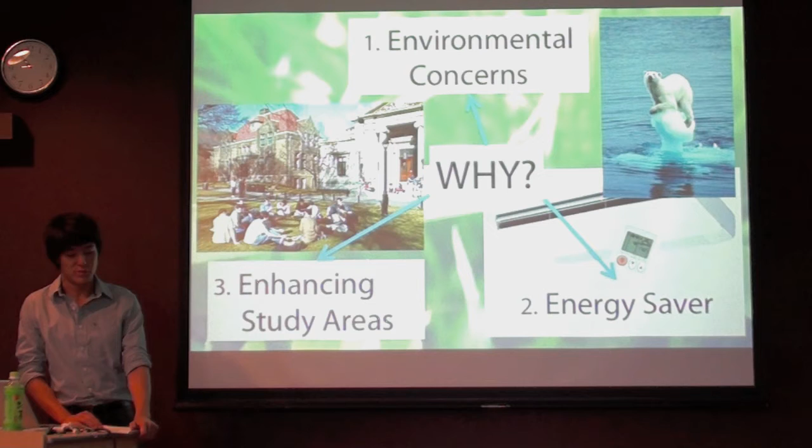The third reason is that implementing a grass roof extends the studying areas for students. Students can use it for chilling out during recess, or having lunch, taking breaks, things like that. So there are many reasons why we should implement a rooftop garden.

Now this is data worthy of comparison, taken at a factory which had a roof twice the size of ours, but which also uses lightweight soil and the type of grass that I'll be introducing - so it's quite good data. As you can see, they were able to achieve a total of 21.5 degrees Celsius of temperature difference before and after implementing the grass. They were also able to save 20% of electricity, and finally they were able to save 59.2 tons of carbon dioxide emission throughout a year.

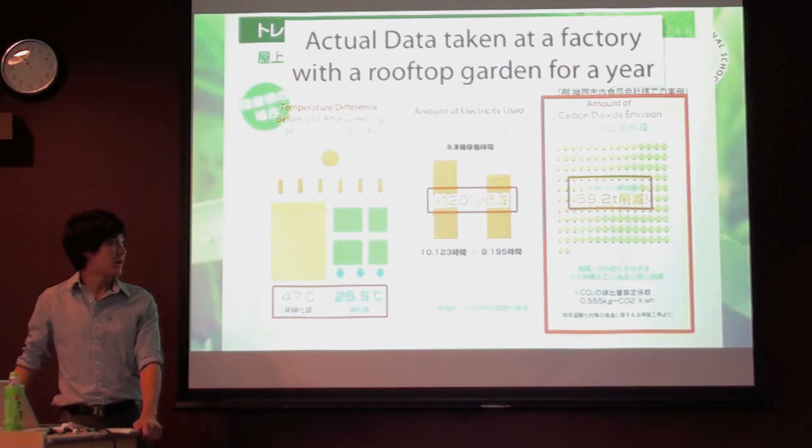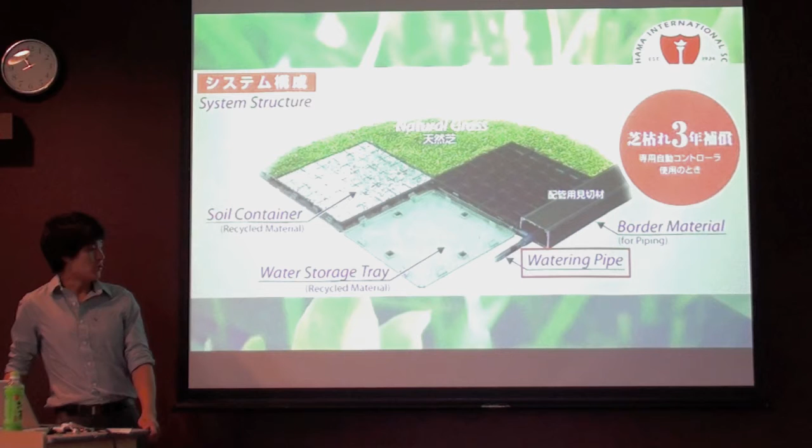This is the general system structure of this square turf light. Firstly, there is a soil container which is placed on top of the roof directly, above the water storage area, which I'll talk about. This is where water will be stored, for example after rain or precipitation. There's also a watering pipe, which can be used during the summer when it's needed for the sprinkler. This is the cross-sectional diagram of the system.

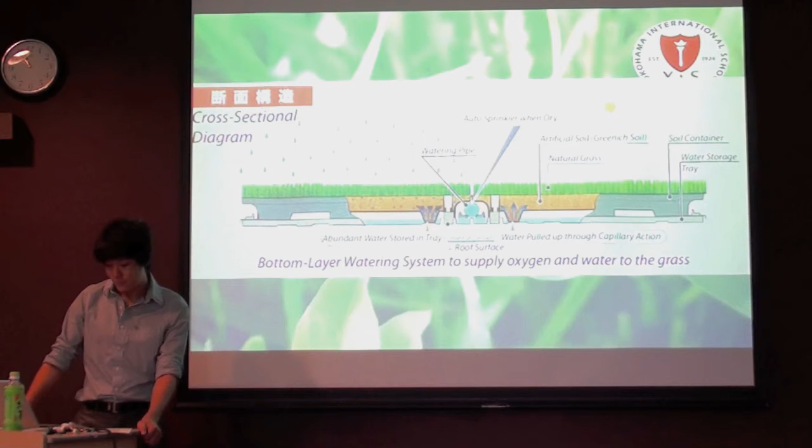Firstly, on the left side, it shows the situation when it's raining. Precipitation from the rain is stored in the water storage tray. And then, when it's sunny, when the grass is dry and the soil is dry, the water is pulled up through capillary action back into the soil where it's needed.

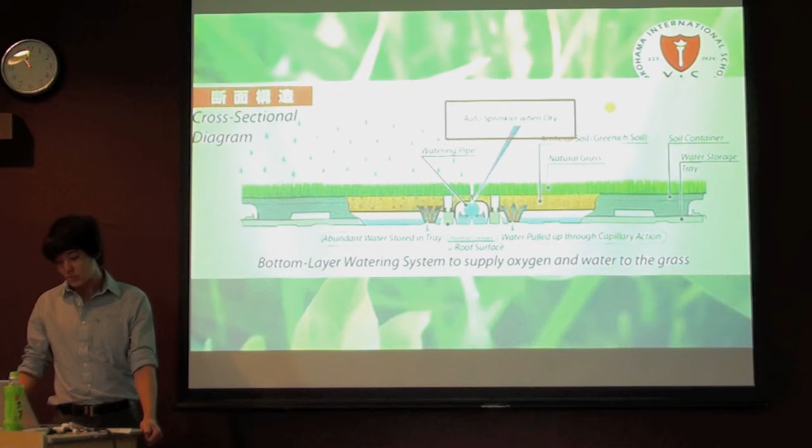Finally, when there's no water in the storage trays, the sprinkler will activate automatically. This is quite advantageous for us, for YIS, in the summer when nobody is here in school. As you can see, there's quite a sophisticated system which will keep the grass healthy.

Now, this is the construction process, and it's quite simple. This is before construction - laying the water storage tray and the soil containers onto the roof. Thirdly, there will be water pipings installed, and then the borders around the grass will be placed. And then finally, the grass itself will be placed. As you can see, they use these square patches of grass, and they just basically put them on next to each other.

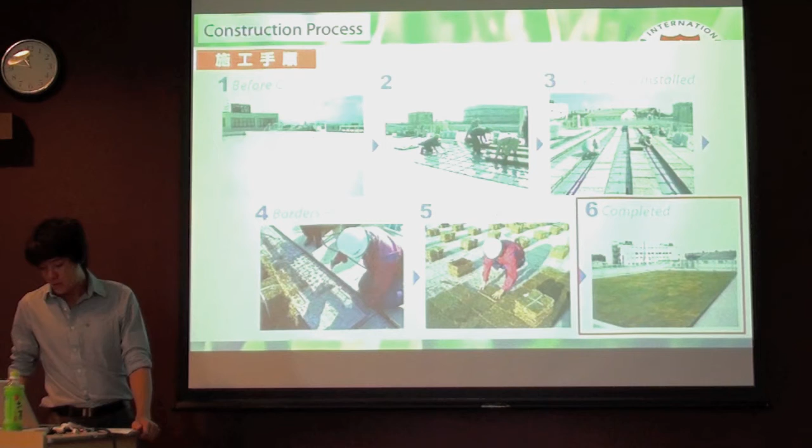And in the last diagram, you can see that this is basically it. So the construction process is quite easy, and it will only take about 1 or 2 days to finish everything on the middle building roof.

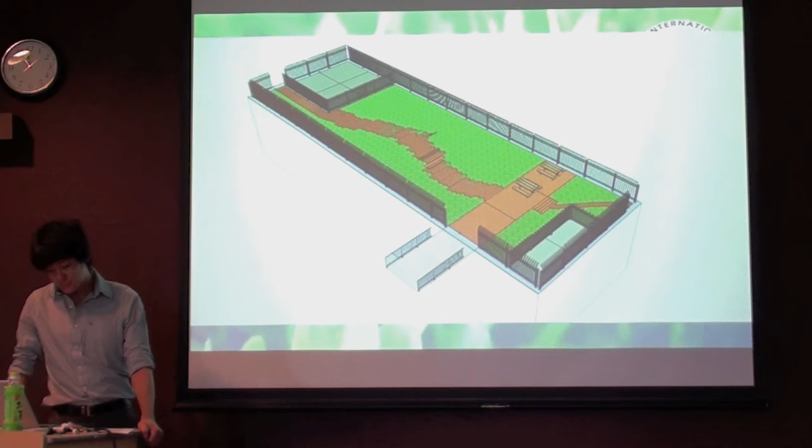Now, this is an image that I drew on Google SketchUp, which might be a representation of what the YIS middle building roof might look like. It's not strictly perfect, but as you can see, we can also implement a wood deck which will connect the path from one side of the roof to the other side of the roof, and also to the entrance of the main building. And this will enable, for example, students to sit on benches, which we already have on the roof, or choose to use the grass.

And by implementing a wood deck, it also saves the grass from deteriorating over many years.

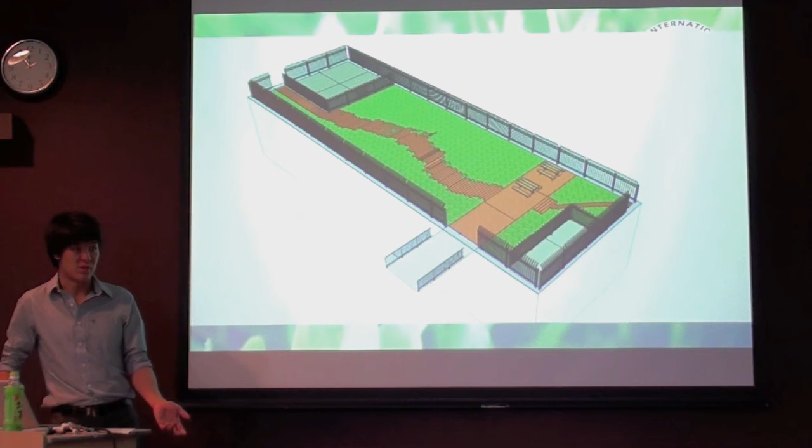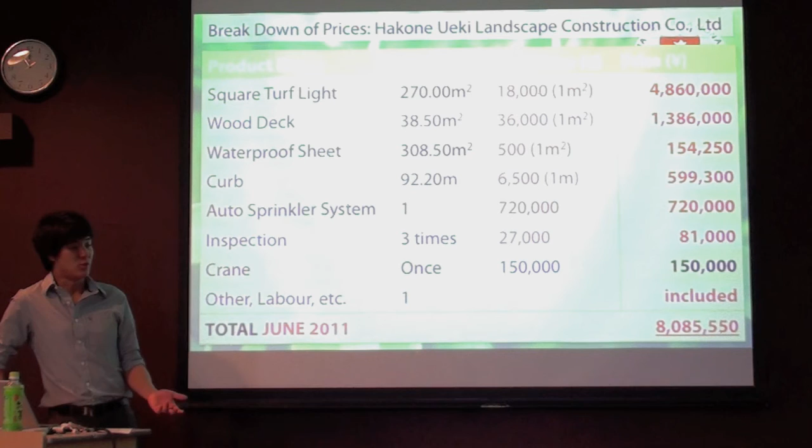And they've also included the labor fees that cost about 1.7 million yen before into the fees that are already given here. Now, as you can see, the new price is about 8 million yen, which is 2 million yen less than what they gave us in March 2011.

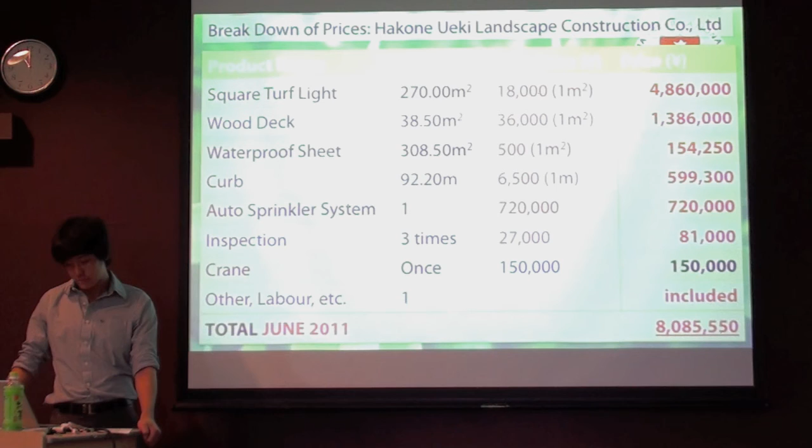Additionally, I was able to get a discount of 1 million yen, different from the discounts they already gave us in the previous slide, which gave a total price of 7 million yen, 3 million yen less than was given in March 2011. However, 7 million yen is still quite a lot of money.